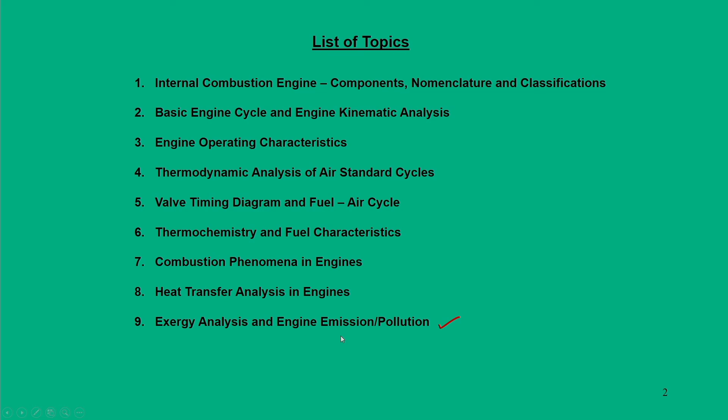Under this heading we will try to find out some thermodynamic aspects with respect to evaluation of energy, and here this evaluation of energy we will interpret in terms of exergy, with the thermodynamic viewpoint or concept of available and unavailable energies. In the other segment we have engine emissions and pollutions. Under this heading we will mainly concentrate on hydrocarbon emission, carbon monoxide emission, oxides of nitrogen, solid particulates and emission index. So let me start with the first topic, that is evaluation of exergy.

Till date we have given attention to the IC engine topic mainly with respect to applications, with respect to engines, with respect to its performance, and with respect to thermodynamic cycles. Now, in this heading we will try to see how much energy we are going to waste, or in terms of available energy of the fuel, how much energy we are going to recover, or is it possible to recover, or is it an irreversible process, so that none of the energy can be recovered.

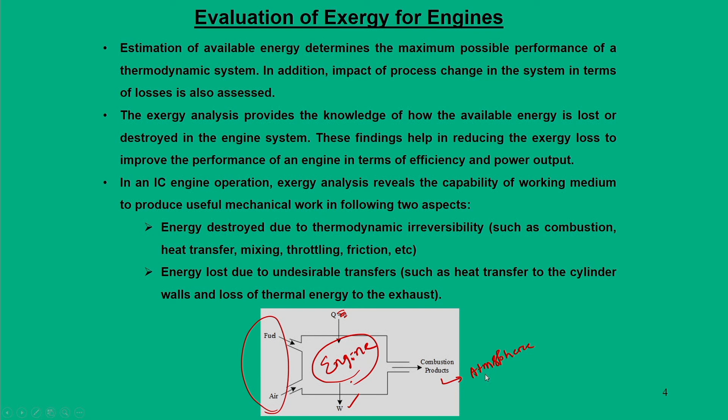So obviously, if you are releasing these combustion products at a higher thermodynamic state in terms of temperature, then obviously we are losing most of the heat, and this is what happens in the engine.

So in the IC engine, the exergy input is contained as chemical exergy of the fuel that is converted to other forms. This exergy transfer is mainly with respect to shaft work output, exergy transfer with respect to cooling water, exergy transfer with respect to exhaust, and unaccounted exergy destruction or irreversibility due to friction, radiation, heat transfer to the surroundings, and operating auxiliary components.

Now, these system loss data are used to develop an explanation of why engine performance changes with variation of design and operating parameters like speed, type of fuel, and load.

So if you try to correlate this particular schematic figure, which is the engine as a closed system, we can view it as a piston cylinder device where, from the intake valve, the charge enters with a certain quantity of heat, and through the exhaust valve the combustion product goes out.

Now, when it goes out, it carries a lot of heat, and our main intention is to tap this heat. In the process of this motion in the piston, we are going to produce the shaft work, and in the entire volume we say it is an engine, and it is a closed system.

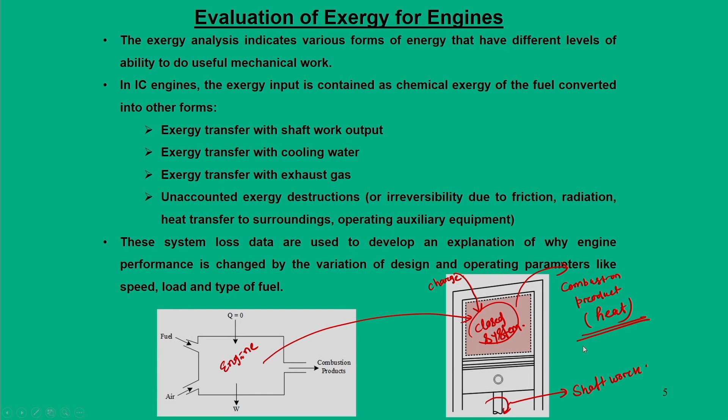Okay, so for this particular model we are going to study how we can think of exergy calculations. So, let me give some background of exergy.

Exergy is the maximum theoretical work obtainable from an overall system, considering the system and environment when the system comes to equilibrium with the environment, or the system finally goes to a dead state. When we refer to this environment, it appears as a dead state, meaning that until that point of time we can extract energy.

In an IC engine it is possible to quantify exergy from the exhaust gas, and for that exergy we are going to make certain assumptions. The gaseous combustion products are a closed system. The combustion products are modeled as air behaving as an ideal gas. We take this assumption because the combustion product, you can say, is mostly assumed as air behaving like an ideal gas, just to give an estimate, even though the combustion product contains lots of emission products such as carbon dioxide and carbon monoxide. Apart from that, we take their properties closer to the value of air.

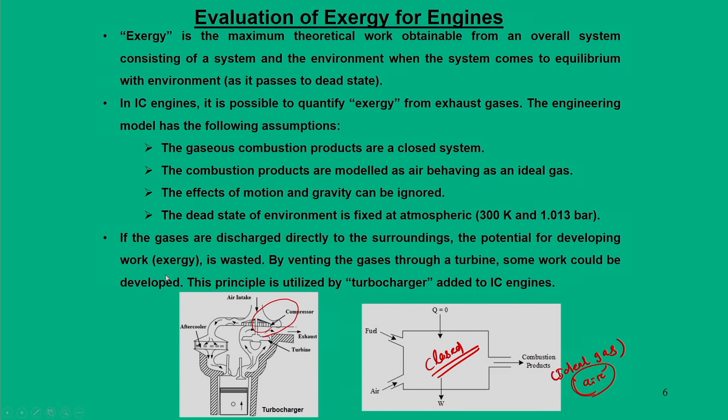So as you can see, by tapping this exhaust gas through a turbine, we are introducing a compressor, where the heat is utilized in preheating the intake charge, and such a concept we call a turbocharger. So the turbocharger concept came into the engine to improve thermal efficiency, because it is seen that the exhaust products have quite large potential in delivering work in terms of exergy, or exergetic work.

Now, to do this particular model, we are revisiting a simple closed system. In this closed system, heat and work interaction is possible with the environment. In our case, this closed system is our engine block or engine, and ideally the system can interact with the environment either in the form of heat or work, and there is a system boundary. The environment has its own boundary, which is at temperature T0 and pressure P0, and the boundary of the overall system is constant.

So what we can say is the system boundary can change, but the overall boundary does not change, and there is a possible work transfer, Wc. But in our case we will mainly concentrate on this particular area, the closed system, and with respect to the engine perspective we are going to calculate the specific exergy. So when we calculate this specific exergy, first we have to think about the total energy content of this closed system. This can be written in terms of internal energy, work, heat, kinetic energy, and potential energy. Here U, V, S are the internal energy, volume and entropy of any arbitrary system, and when you put the subscript 0, they represent the dead state.

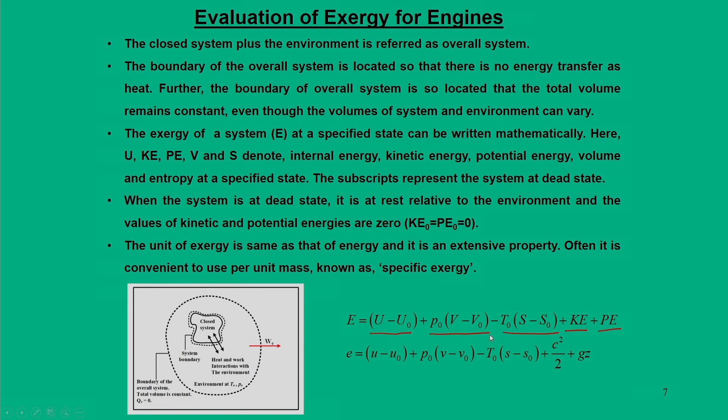So in all, we can say the total energy or exergy can be calculated by taking their differences. This is the thermodynamic expression for exergy, and in many instances, if the system is at dead state and at rest relative to the environment, the value of potential and kinetic energy changes are zero. So these terms can be neglected, and this is true in our case for IC engines as well. When represented on a mass basis, we write it as small e, and all the capital terms are replaced with small notations u, v, and s. So this is how exergy is calculated mathematically for a thermodynamic system, and later we will see how this equation can be utilized to calculate exergy for an engine.

Now, let me move to the next segment, that is engine emission and air pollution. So, in IC engines, engine emissions are the undesirable features that come out in the combustion products, and these are mainly hydrocarbon, NOx (oxides of nitrogen), and carbon monoxide.

We have seen exhaustively that during the combustion process under certain instances, the engine runs with a variation in the rich and lean mixture. So accordingly, these numbers or their relative importance differ. For example, with a rich mixture, we have sufficient fuel but not enough oxygen. With lean mixtures, we have sufficient oxygen but not sufficient fuel. In such cases, the products that come out take advantage of this.

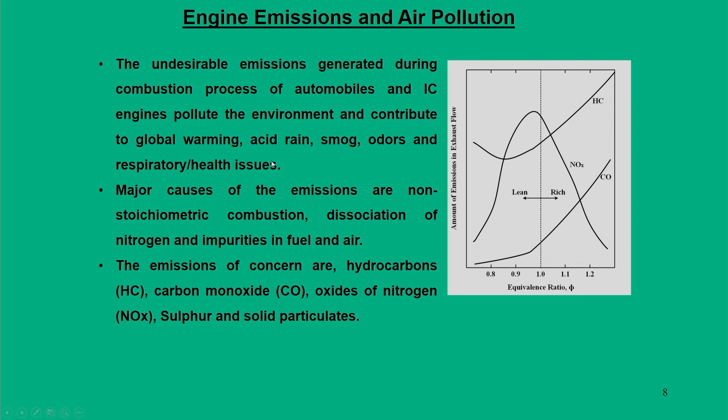In this case, the emissions of our concern are hydrocarbon, carbon monoxide, oxides of nitrogen, sulfur, and solid particulates, and these mainly appear in the CI engine. Why do we look for these engine emissions? Because they are a threat for global warming, acid rain, smog, odors, and other related health issues.

This particular figure shows the variation of different emissions with respect to equivalence ratio. We can see that a fuel rich air-fuel ratio does not have enough oxygen to react with all the carbon and hydrogen, so both hydrocarbon and CO emissions increase. Hydrocarbon emissions also increase at very lean mixtures due to poor combustion and misfires.

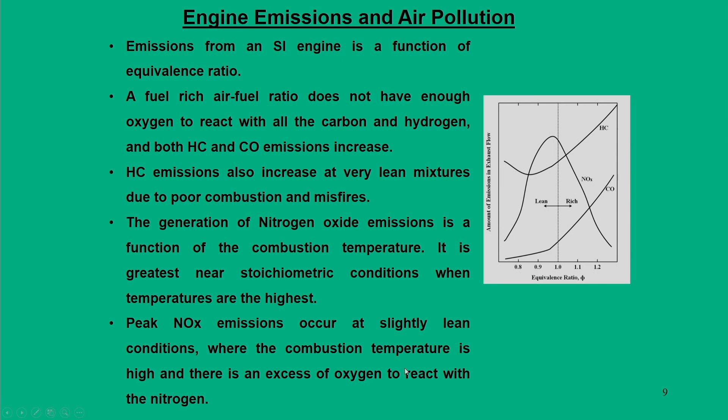The generation of nitrogen oxide emissions is a function of combustion temperatures. It is greatest at near stoichiometric conditions when temperatures are highest. Peak NOx emissions occur at slightly lean conditions, where combustion temperatures are high, because there is excess oxygen to react with nitrogen.

Now let us see individual ones. First, hydrocarbon emissions, symbol Hc. The exhaust gas leaving SI engines contains about 6000 ppm of hydrocarbon components, which is equivalent to 1 to 1.5% of the fuel.

This means about 40% of them are unburnt gasoline components, and the rest are partially reacted components. There is a non-equilibrium situation that happens during this combustion process, where some components crack or break, while other molecules could not be broken because they did not get the adequate environment.

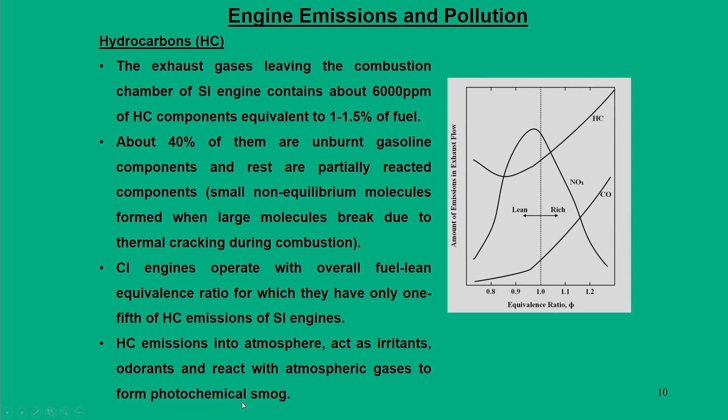On the other hand, if you look at CI engines, they operate with an overall lean equivalence ratio, and they have only 1/5 of hydrocarbon emissions. The hydrocarbon emissions into the atmosphere act as irritants, odorants, and react with atmospheric gas to create photochemical smog, so it is not advisable to have this.

The possible causes of hydrocarbon emissions are the non-stoichiometric air-fuel ratio that we have seen, incomplete combustion, and crevice volume - that means around the piston, when it slides in the cylinder, there are piston rings that come in contact, and those areas occupy some space which we call crevice volume.

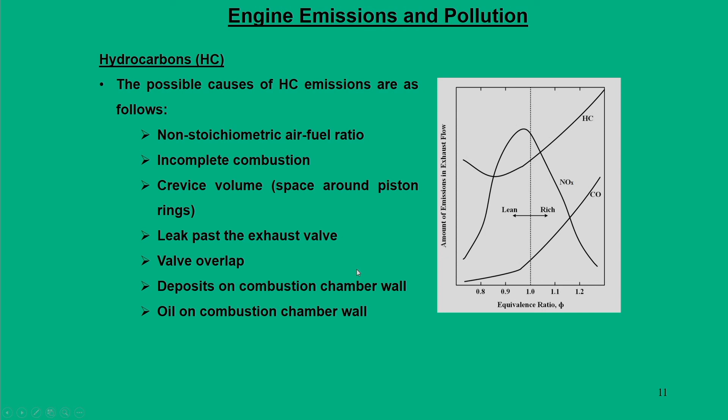Then we may have leak past exhaust valve, there may be valve overlap, there may be deposits in the combustion chamber, and there may be oil in the combustion chamber. So all these things are the possible sources of hydrocarbon emissions.

Now we will move to carbon monoxide emissions. We can see that carbon monoxide is a colorless, odorless, but poisonous gas, and it is generated from the engine when it is at a fuel rich situation, mainly predominant during starting and the acceleration phase.

When there is not enough oxygen to convert all the carbon to CO2, the fuel does not burn completely, while some of the carbon ends up as CO. Ideally, the combustion reaction is to be complete; if it is incomplete, CO does not go back to CO2, rather it remains as it is. But when this CO finds an adequate environment of combustion, it can react with oxygen to form CO2 and heat.

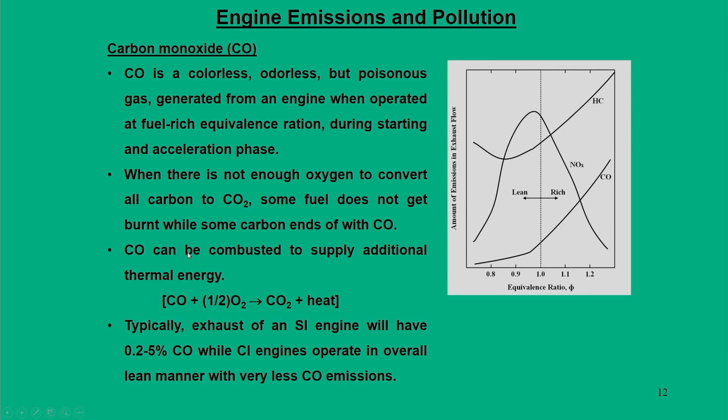Now, if this particular ambience can be created, then it is better for the engine.

Next we will see oxides of nitrogen. The exhaust of an engine can have up to 2000 ppm of oxides of nitrogen, and most of them are in the form of NO or NO2. In addition, the temperature in the engine is also very high, in the range of 2500 to 3000 Kelvin.

Because of these temperatures, there is a very likely situation that dissociation can happen. Now, what are the possible sources of dissociation that could be possible?

If the nitrogen already in the air breaks into 2N, and oxygen molecules split into oxygen atoms, other possible reactions could occur: O plus N2 becomes NO plus N, O2 plus N can form NO plus O.

If you have H2O, it can react to form OH plus half H2. Even nitrogen can react with this OH to form NO plus H. Then NO plus O2 can react to form NO2 plus O. NO and H2O can also react to form NO2 and H2.

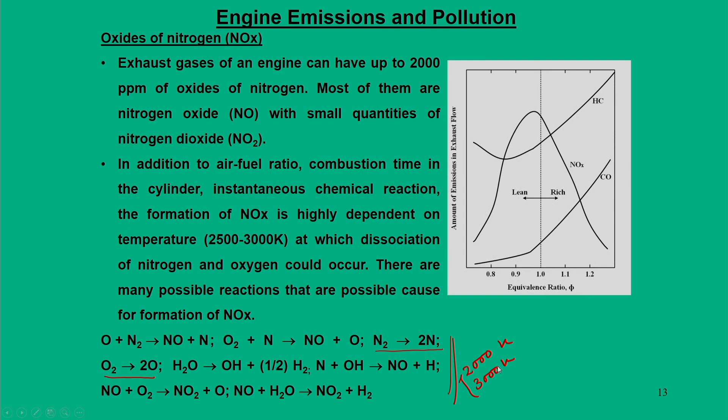These are the possible reactions that could happen in a temperature range somewhere around 2000 to 3000 Kelvin. It is not necessary that all the reactions will happen, but only when there are adequate pressure and temperature conditions do appropriate reactions take place.

These reactions are beyond the control of the users, but let us see how maximum NOx is formed, which occurs at slightly lean equivalence ratio. When you look at the formation of maximum NOx, it is formed at slightly lean equivalence ratio, because there is excess oxygen which can combine to form NOx.

The NOx released from the exhaust reacts with atmospheric gases and becomes a major cause of photochemical smog. This is a threat for the environment because when NO2 is formed from the engine, it goes to the atmosphere, gets energy from sunlight, and breaks again to form NO plus O, creating smog.

When you have a single atom of oxygen, it can react with O2 to form O3. This monoatomic oxygen is highly reactive and can initiate many reactions.

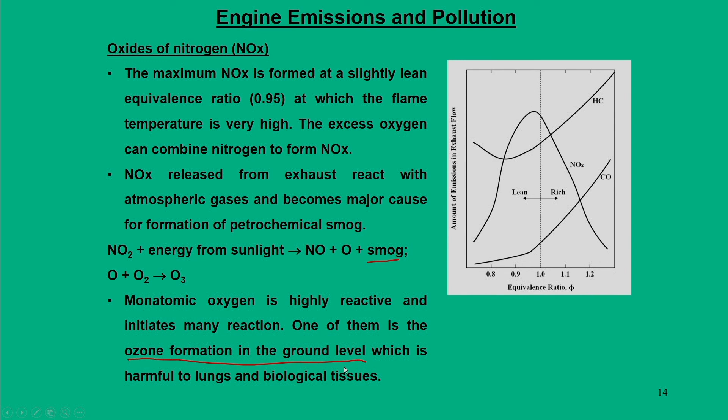One result is the formation of ozone at the ground level, which is very harmful for lungs and biological tissues. So first we have smog, and the other effect is ozone formation at ground level. Ozone formation at higher atmosphere is a great advantage, but ozone formation at ground level is a threat for human health.

The next category of emissions are solid particulates. This is mainly seen in the exhaust from the CI engine, and normally the solid particulates, called carbon soot particles, are formed or generated in the fuel rich zones within the engine cylinder.

They are seen as heavy exhaust smoke emitted from trucks and locomotives during acceleration uphill from a stop. About 25% of the carbon in the soot comes from the lubricating oil components that vaporize and react during combustion.

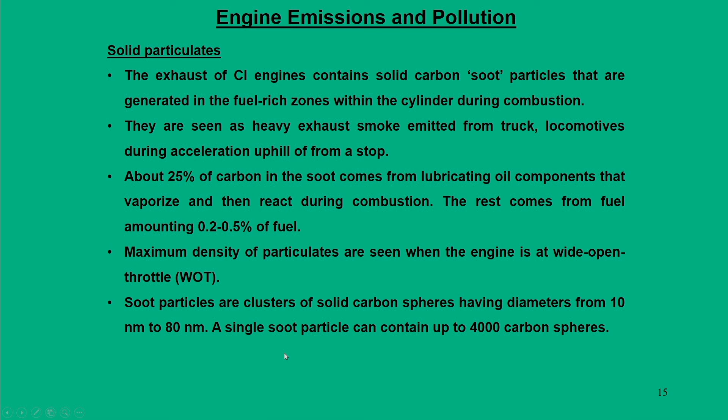The solid particulates, the carbon spheres generated in the combustion chamber, are formed because they do not find enough oxygen to convert all carbon to CO2.

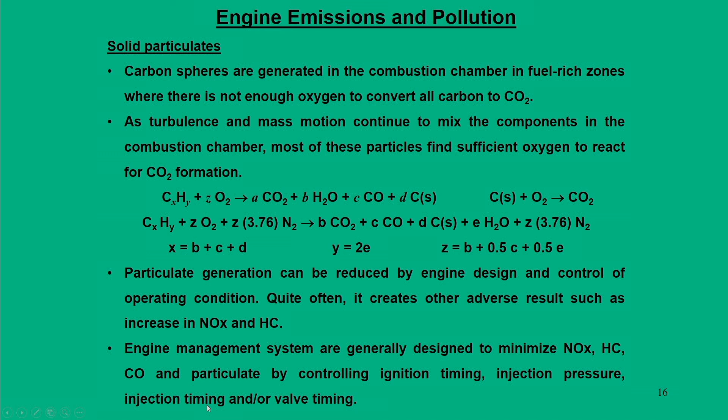Particulate generation can be reduced by engine design and control of operating conditions, since it creates adverse results such as increasing NOx and HC. For this purpose we need a proper engine health management system, designed to minimize NOx, hydrocarbon, CO and particulates by controlling ignition timing, injection pressure, and valve timing.

And lastly, we will see how these emissions are quantified. We have studied that the most important emissions are NOx, CO (carbon monoxide), hydrocarbons, and solid particulates.

To quantify this, we can represent mathematical expressions by specifying them as specific emissions, represented as gram per kilowatt hour. So one way is that we can specify emissions with respect to brake power, so its unit becomes gram per kilowatt hour.

The other way we can represent is emission index with respect to fuel flow rate, which is gram per second by kg per second. So we call these SE or EI. SE stands for specific emissions, EI stands for emission index.

For SE calculations, the denominator part is brake power, and for EI calculations the denominator part is mass flow rate of the fuel. Whatever emissions you require, the numerator contains the similar terms. For example, if you require the specific index for NOx, then we can have mass flow rate of NOx in the calculations. Likewise, appropriate expressions can be utilized.

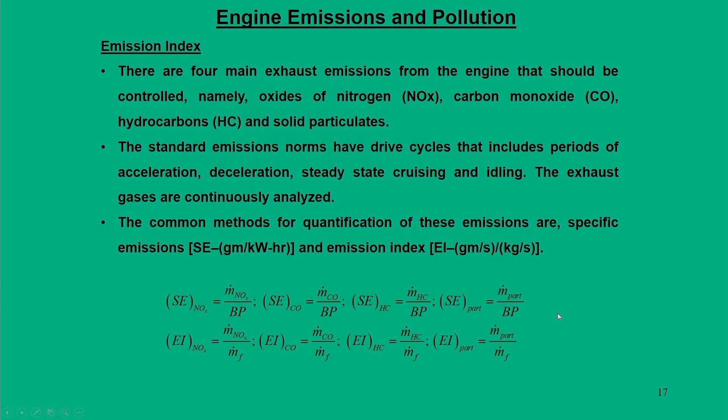So with this we conclude this particular topic. Now we will try to see some numerical problems. Here we have emphasized two topics: one is exergy, the other is emissions.

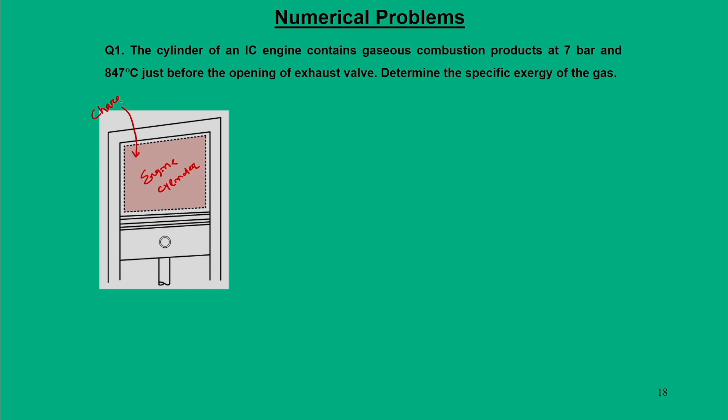The first problem is based on the calculation of exergy from the exhaust of the engine. As you see the schematic of this figure, we have this engine cylinder. The fresh charge comes in, and here the exhaust product, or we say combustion product, goes out. As a result, we produce shaft work W.

So what is the question given? We have gaseous combustion products which are at 7 bar and 847 degree centigrade in the engine cylinder. So engine conditions are arbitrary conditions: P as 7 bar, temperature as 847 degree centigrade, or we can say this is about 1120 Kelvin.

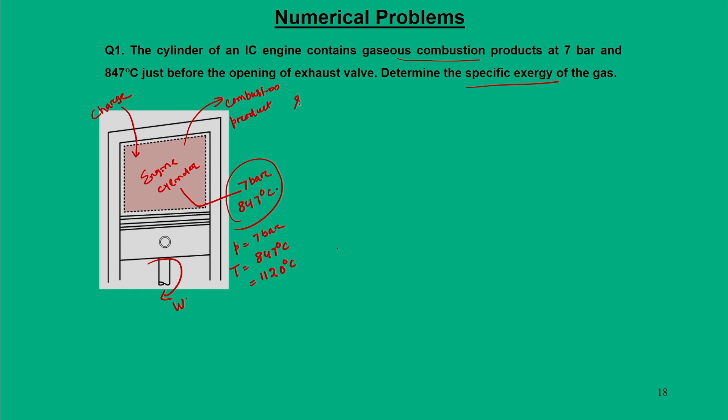Now since we are going to calculate the specific exergy, to start the solution, first we can state the assumptions used: closed system, and for the combustion products we say they behave as ideal gas, no change in kinetic energy and potential energy, and lastly the dead state, which is the environment.

Dead state means it goes to atmosphere, and this dead state has P naught as 1.013 bar and T naught as 300 Kelvin. So with this assumption we are going to calculate the specific exergy.

Specific exergy, mathematically, we can write E as U minus U0, plus P0 into V minus V0, minus T0 into S minus S0, plus kinetic energy plus potential energy. As I said, this goes to 0, and this also goes to 0, that is the change is 0.

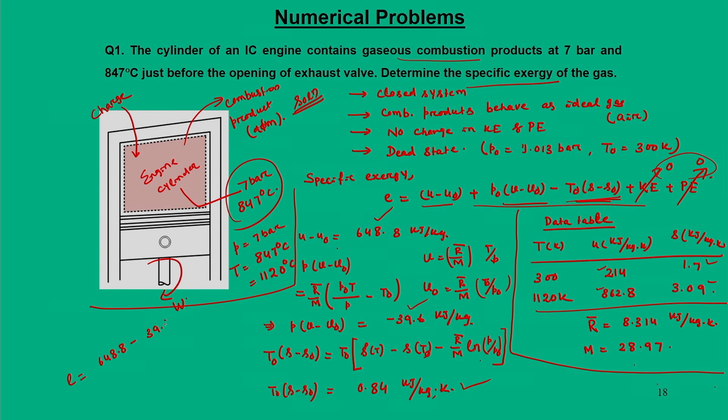So finally, when you put this term into this first equation, the E value will be 648.8 minus 39.6 minus... sorry, this value is T0.

So 300, that is T0 into S minus S0, into 0.84.

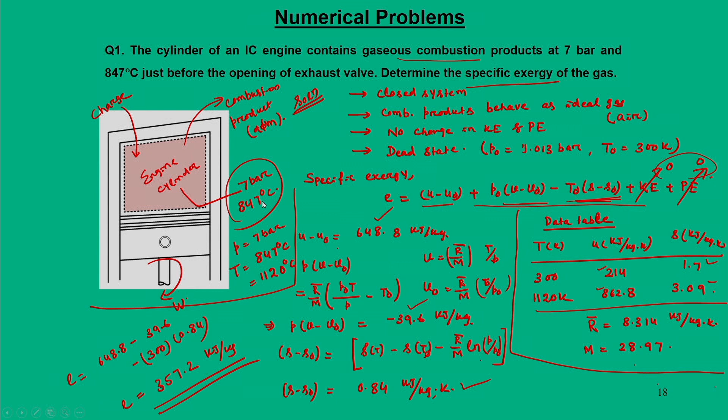Now we will move to the next problem, on engine emission. The given question is that we have a 12 cylinder engine, 2 stroke CI engine that operates at 550 rpm to produce brake power of 2450 kilowatt, and it uses stoichiometric diesel fuel.

The engine has a bore of 240 mm and stroke of 320 mm, with volumetric and combustion efficiency as 98%. So you have to calculate the mass flow rate of fuel into the engine, specific emissions of unburned gases, and emission index. So let us start the solution.

To start the solution, since we require the volumetric efficiency and combustion efficiency, we also require mass flow rate of air. Mass flow rate of air can be calculated from its volumetric efficiency: eta V times density of air, into displacement volume V d, into RPM divided by small n, that is number of revolutions.

This is the expression. So we have to find out V d, displacement volume, which requires number of cylinders into pi by 4, B square S. B is given

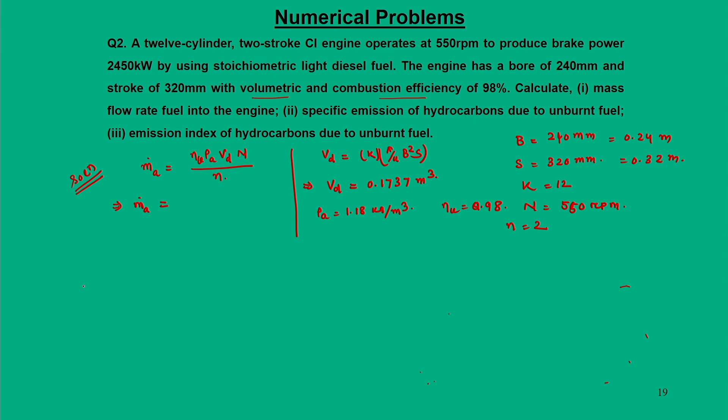So by putting these values here, we get mass flow rate of air as 0.92 kg per second.

Mass flow rate of fuel can be calculated, and since it is stoichiometric light diesel, we can say mass flow rate of air divided by air fuel ratio. Air fuel ratio in this case is 14.6, so we write 0.92 by 14.6, giving m dot f as

0.0634 kg per second. So this is all the data given. Now let us come back to the first answer: you get the mass flow rate of fuel.

Second is specific emission of hydrocarbon. For this we write what hydrocarbon is left unburnt, which is nothing but 1 minus combustion efficiency into mass flow rate of the fuel. So 1 minus 0.98, and mass flow rate of the fuel is

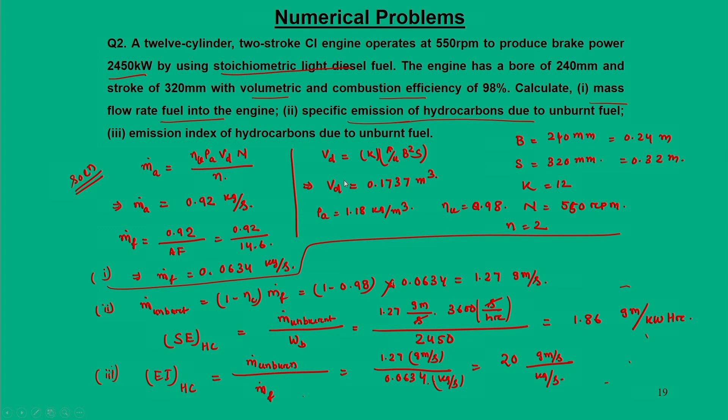With this I conclude this lecture for today, and we have also completed Module 3, on IC engines, the internal combustion engine part. Thank you for your attention.